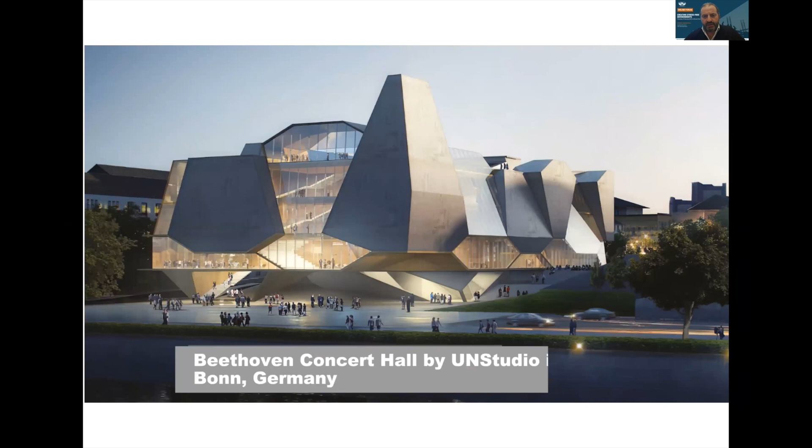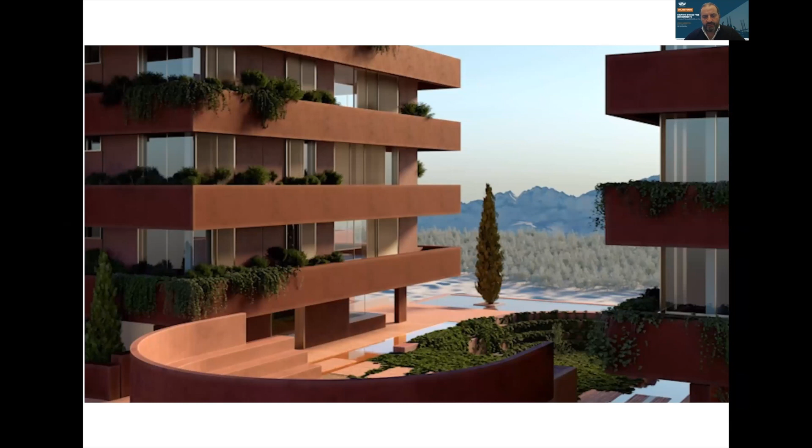This is actually the architecture of Ricardo Bofill, which is under construction now on the site, and this is the actual rendering of our building. We have developed several schools on the site for commercial loans.

This is how our site looks like at this point. It is under development, rather already finished.

For the video, that is the master plan comparison of how we are going forward. Within the territory we have Lisi Lake, one of the main recreational areas within the city. We are keeping it as a recreational area, so it will always be recreational and for public use, with some commercial zones and activities.

In total, as I mentioned, we have 350 hectares of land, which is now under development, not yet in the master plan.

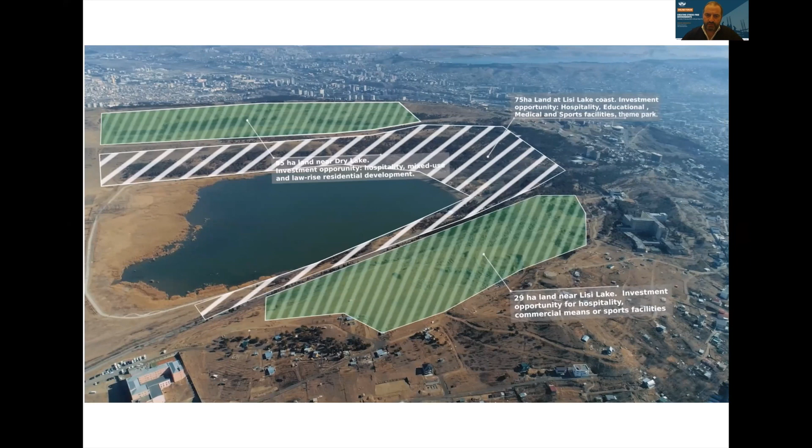This is already a ski resort called Bakuriani. We have invested around 45 million on the site. We have opened the first 5-star hotel, Georgian branded, actually, proud to say. And this is one of the main destinations in Georgia during the winter time.

The site is also known for the summer period. Now you are looking at the resort where we have in total 9 hectares. This is the architecture of WATG, British architects, well, actually international architects, but we work with their London office. In total we are developing over there 9 hectares.

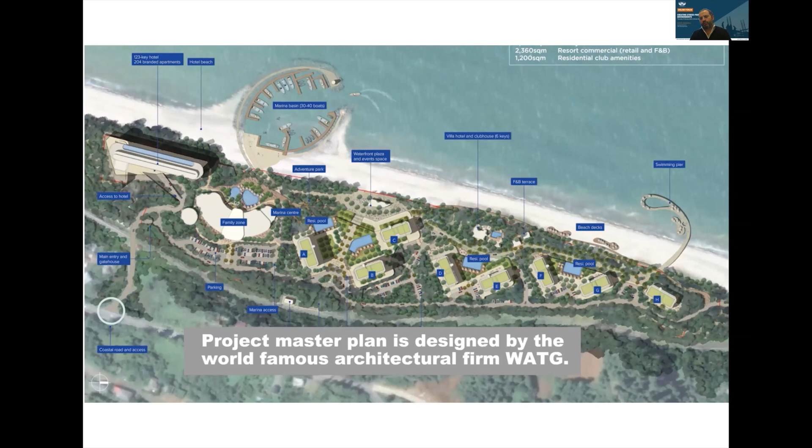Our main approach is that we are urban developers, so every project for us is urban development. We are not developing standalone buildings. These are some examples of the projects of WATG, who are our partners, as I mentioned. This is a small video about what we do.

Now I will move to the presentation of Lisi Green Town. I'm proud to say that at this point we have planted more than 50,000 trees on the site, which gives us a parameter of 7.7 per the WHO minimum standard for green zone per person, when the EU standard is 1.4.

From the point of view of Georgia, Georgia is a very old country, with history starting from BC. We have many historic places under UNESCO heritage, and we'll be more than glad to host you in our country if you would love to visit.

This is the distance of our Lisi Green Town from the airport. It takes up to about 10 minutes, depending on where you are standing in the city, but mainly from the city center it takes not more than 10 minutes.

Well, this is an example and picture of our main Freedom Square of Tbilisi. This is the old part of Tbilisi. And again, this is the Lisi Green Town, which we are developing. You can see the first and second districts, which we have already developed—150,000 square meters have already been built.

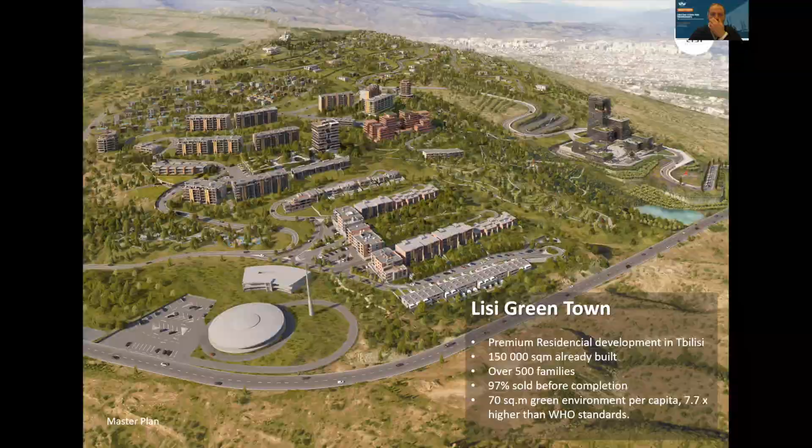As you have already seen in the video, around our site we have LISI Lake, which is a very well-known recreational area for Tbilisi inhabitants and guests of the city.

These are the two main high schools, Georgian British Academy and American Academy, which was developed by us. Actually, in one of the academies we are partners. One was just constructed by our company in order to also create traffic on the site.

It must be noted that in 2010, when we started development of the site, it was not even perceived as suitable for living. Today, this location is one of the most famous and most expensive places to live.

So again, our approach is to develop in an urban way. We are setting our own rules on the site, of course, along with the rules set by the city hall. These are the pictures of existing places on the site.

We have sulfur baths on the site. Tbilisi is known for its hot springs. Actually, the name Tbilisi comes from the word for warm springs, so the history of the city is linked to warm springs. We are very glad that we also have the possibility to have warm springs on the site.

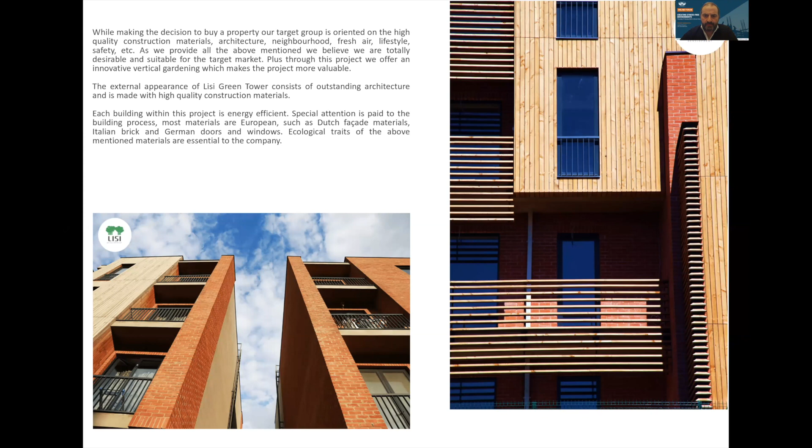These are the pictures of our existing buildings, and these are examples of the interior of our buildings.

We are also developing a villa district, which is a different product line within our products. In this case, we develop the district itself with the infrastructure, and we sell the land with a set of rules. So when a buyer is buying land, we set rules for how big the building must be, the height of the building, and the footprint of the building. Within these rules, we try to stick to the urban development and urban rules that we are adapting on the site.

This is the villa district again, and this is an example of one of the villas.

This is again the UN Studio building, which we call LISI Green Tower. As you can see, it's white and green — we have pots on every level, so it will all be green once we plant the trees on the site. Every corner over there has pots which we are developing with greenery.

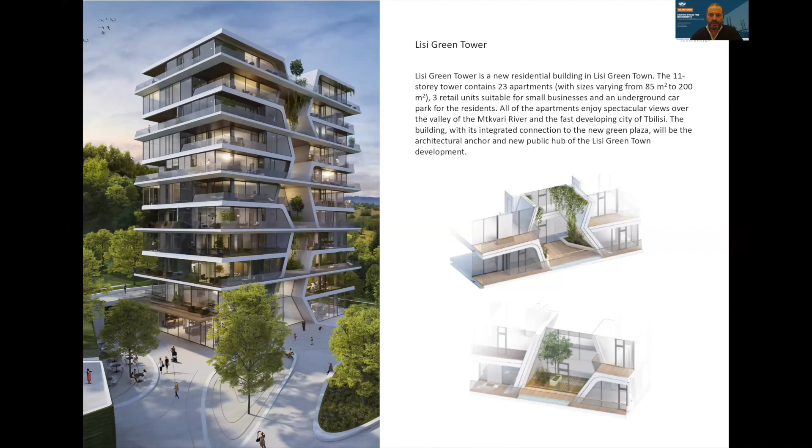This is an example of the internal design of apartments within LISI Green Town. And this is the Ricardo Bofill building. I think every architect, when they look at this type of building and the stairs we are developing, will understand that it's the architecture of Ricardo Bofill.

This is the team of gardeners we are very proud of, who are doing a tremendous job on the site — one thing is to plant, another is to take care of all the greenery we have planted on the site. The trees you can see with the gardeners were planted by us; every tree was planted by us, and none was taller than any gardener standing there. We are proud that we already have a forest effect on the site within 10 years of development.

This is also our buildings. These are all pictures of our parks which we have developed. In total, we have 7 parks on the site at this point.

Now we are trying to eliminate the grass as much as possible, since it needs a lot of water, and also the cutting takes time. From an environmentally friendly approach, it's better to have less grass on the site.

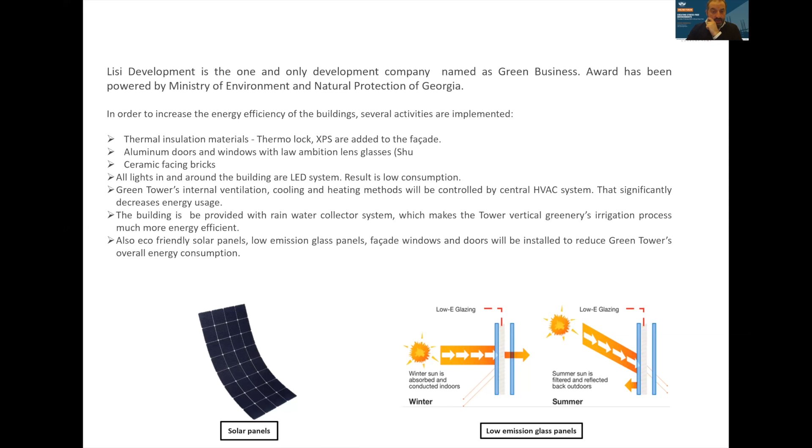As I said, we're using mainly friendly materials from an environmental point of view - brick, wood, and our partners are Schüco, Reynaers for the aluminum. It also must be noted that we started the separation of garbage on the site.

Along with that, light detectors are installed in every house in order to use less electricity. An internal ventilation system was made within the UN Studio building to eliminate electricity use and control it.

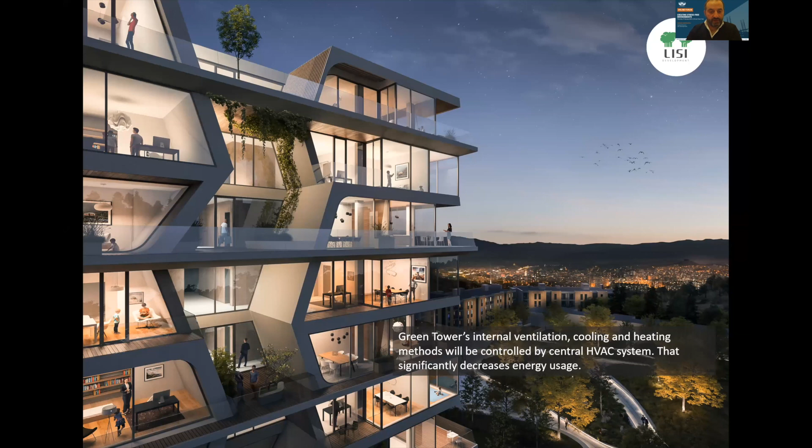Also, what we are proud of is that we started to harvest rainwater from the roofs, and now we are reusing this water for the greeneries and irrigation of our sites. Along with that, we are using technical water which we get from several kilometers away from our site, so we're not using tap water for the irrigation.

Along with that, we have promoted electric vehicles, so we have many electric chargers on every street of our district.

On every building, we have thermal insulation, so all the buildings are energy efficient, and approximately up to 30% less energy is used for every building which we are constructing on site.

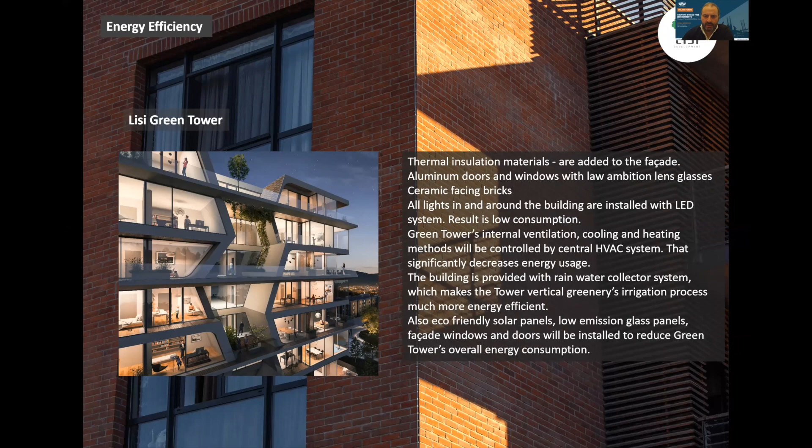Also, we have put some public transport within the district itself, so we have two electric buses which the inhabitants can use to get around within the territory.

These are also some pictures of our development. Security on the site is, of course, 24 hours.

It must be noted that during COVID-19, demand has grown on our product, because the demand for a green concept and low density has grown not only in Georgia but all around the world. So once again, the green concept is getting more and more popular on the Georgian market along with the world.

We have promoted this from the marketing perspective. We made a commercial against fireworks in order to avoid harm to the birds, pets, and so on. We had about 3 million views of our ad, when the population of the country is 3.7 million.

Along with that, we are proud to say that we have helped Ukrainian children with several events during last year. We made 4 events for kids in Ukraine from cities which were freed from the invaders.